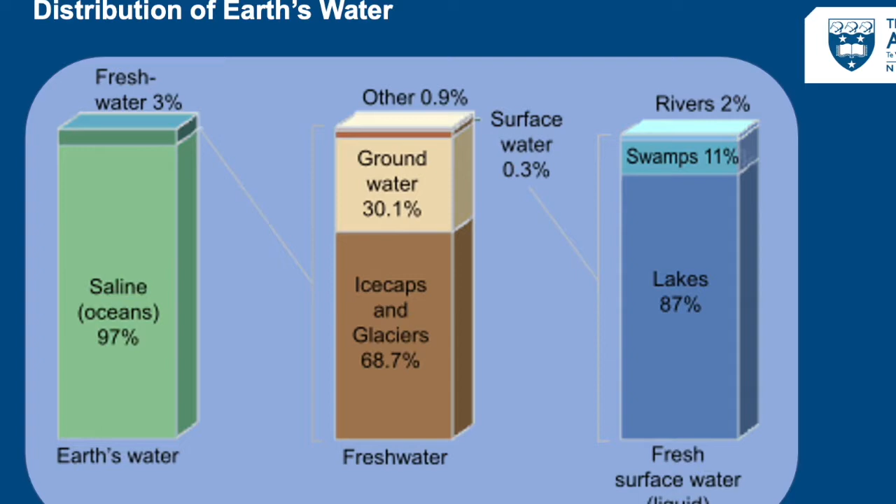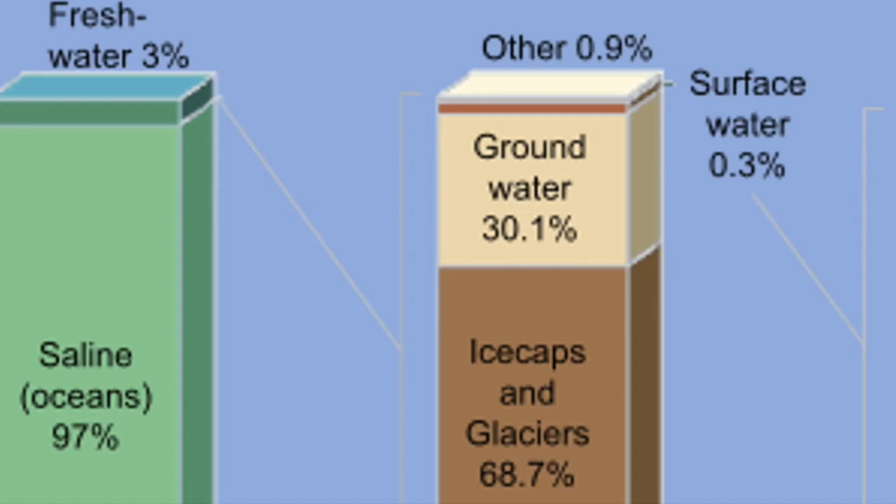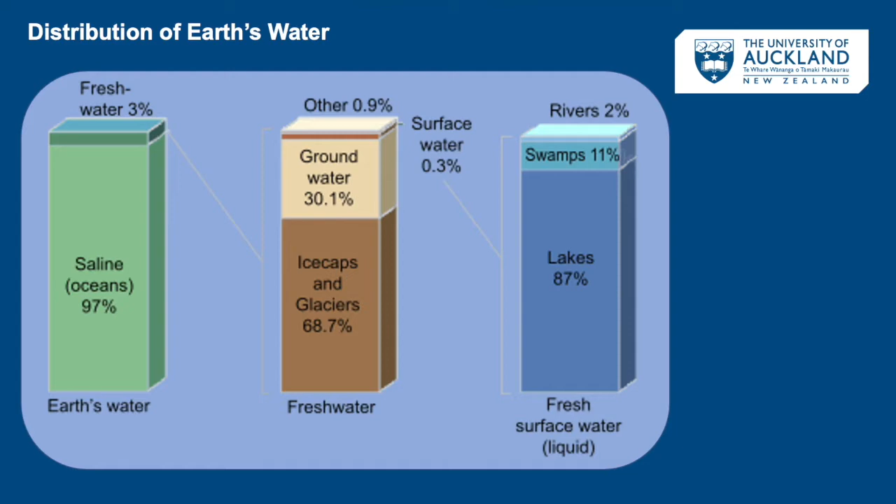The distribution of water on the Earth's surface is extremely uneven. Only 3% of the water on the surface is fresh. The remaining 97% is in the ocean. Of the fresh water, 69% resides in glaciers, 30% underground, and less than 1% is located in lakes and rivers. Looked at another way, only 1% of the water on Earth's surface is usable by humans, and 99% of the usable water quantity is situated underground.

The water cycle consists of three major processes: evaporation, condensation, and precipitation. Evaporation is the process of a liquid's surface changing to a gas. In the water cycle, liquid water in the ocean, lakes, or rivers evaporates and becomes water vapor. Condensation is the process of a gas changing to a liquid. In the water cycle, water vapor in the atmosphere condenses and then becomes a liquid.

Unlike evaporation and condensation, precipitation is not a process. Precipitation describes any liquid or solid water that falls to Earth as a result of condensation in the atmosphere. Precipitation includes rain, snow, and hail.

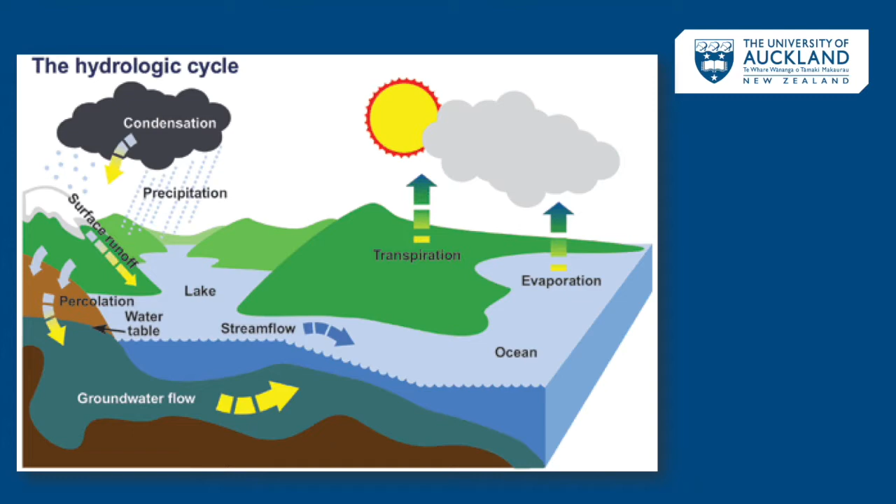The water cycle has a dramatic influence on the Earth's climate and ecosystems. Climate is all the weather conditions of an area evaluated over a period of time. Two weather conditions that contribute to climate include humidity and temperature. These weather conditions are influenced by the water cycle. The water cycle also has an influence on the physical geography of the Earth. Glacial melt and erosion caused by water are two of the ways the water cycle helps create Earth's physical features.

Water is managed at three levels of government: the national, regional, and local. The main plans we use to manage water are the Auckland Plan, the Unitary Plan, the Long-Term Plan, and our Asset Management Plans. Together, they provide direction, development rules, finances, and work program that determine the Council's activities. They also affect what everyone else can do across the region.

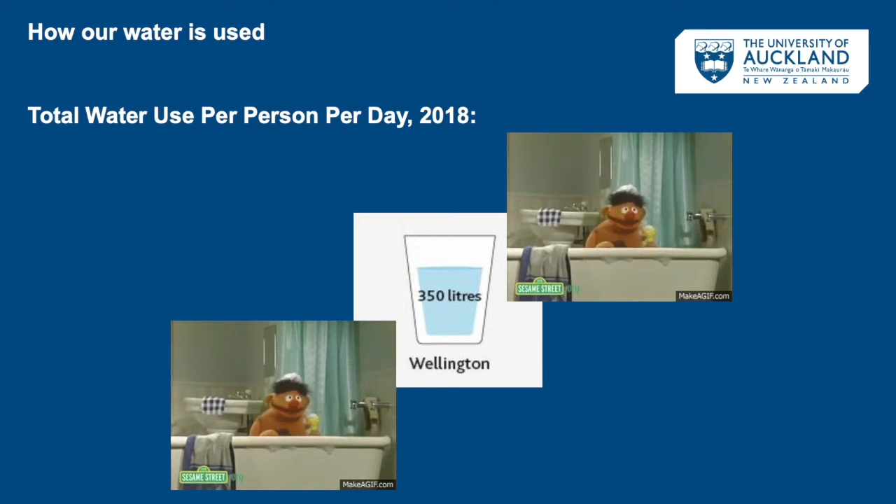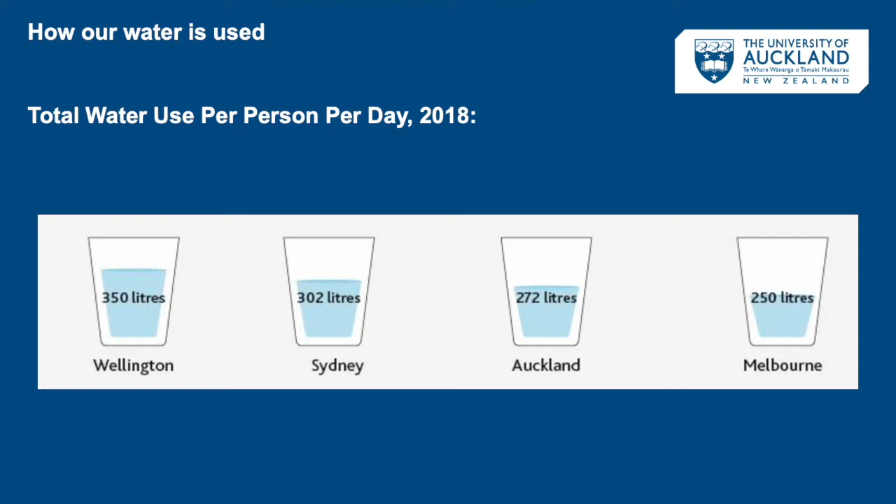Let's start with drinking water. How do we use drinking water? In this graphic, we use a comparison between the average water use per day per person in 4 different cities in New Zealand and in Australia. As we can see, in Wellington, on average, each person uses 350 liters per day. That's an average of about 2 bathtubs full of water per person per day. Residents of Sydney are a bit more conservative with their water usage at 302 liters. In Auckland, we do a better job reducing consumption at about 272 liters. And in Melbourne, residents sip a mere 250 liters per day.

The majority of this water is used for residential purposes. For example, we use 27% just for showering, another 23% goes to washing clothes, 18% gets flushed down the toilet, and 14% goes through the water taps.

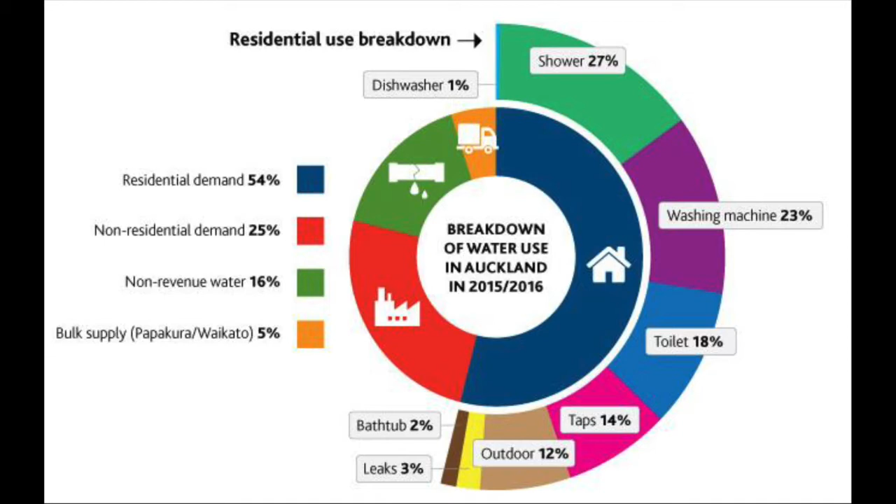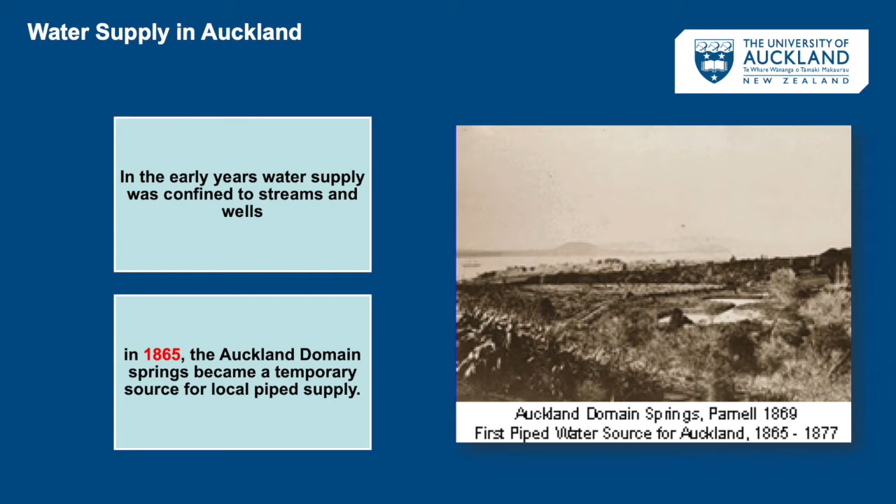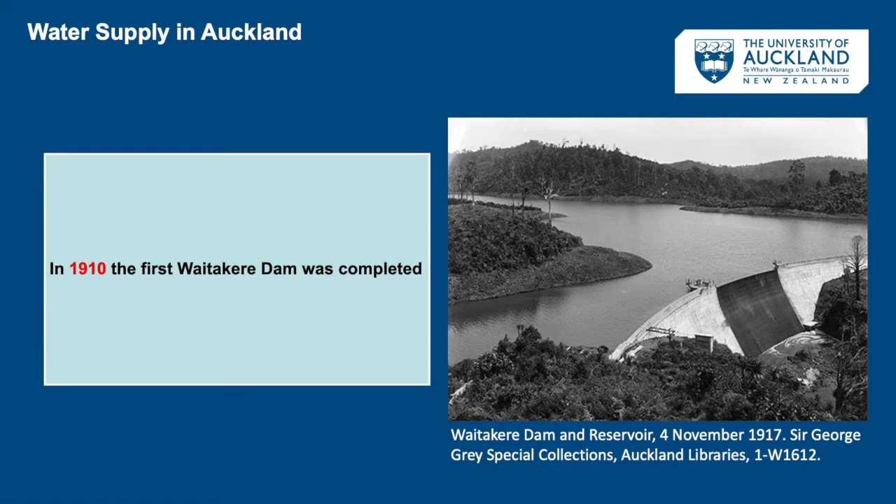Aucklanders haven't always consumed so many liters of water per day. Consumption was a lot different 100 years ago, and also the source of water was quite different. 100 years ago, the sources of water were mainly from streams and wells. In 1865, the Auckland Domain became a temporary source of water for Aucklanders. Then, Western Springs became the primary source of Auckland's water supply. In 1910, the first Waitakere Dam was completed. From 1950 to 1977, the Hunua Ranges dams were constructed, which became the main source of Auckland's water supply and continue to be to this day.

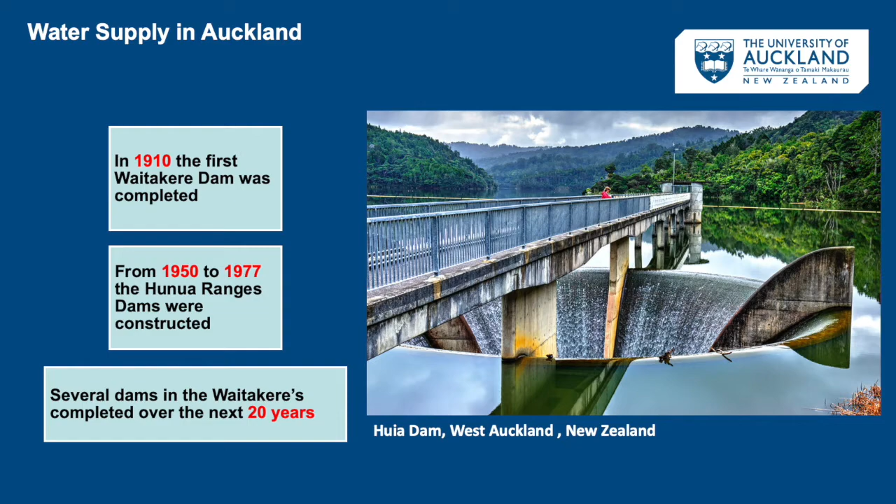Watercare is New Zealand's largest water and wastewater company. It supplies around 400 million liters of drinking water daily to Auckland. These waters are from 10 dams, 1 river, and 1 underground source. 60% of the water is produced from 5 Hunua dams, 25% from Waitakere dams, and 10% from the Waikato River. The remaining 5% from Onehunga wells.

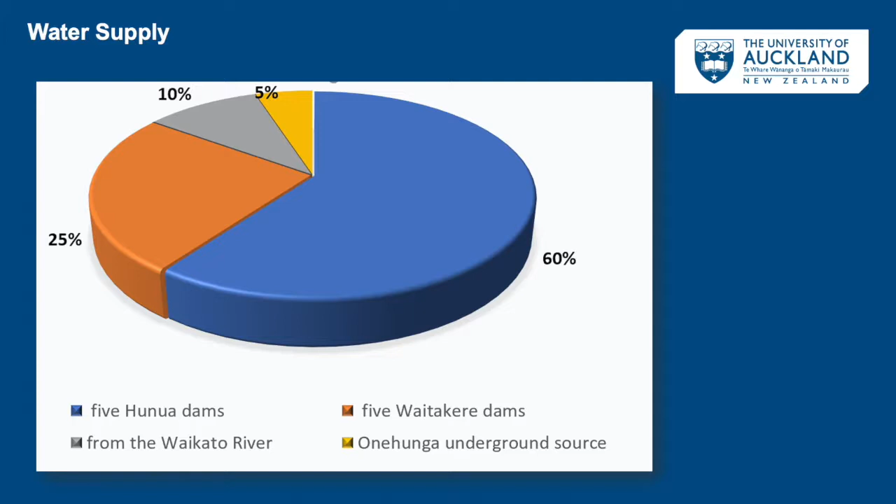Other cities around the world are developing long-term sustainability plans for their water supplies. For example, by 2040, London will manage its rainwater sustainably to reduce flood risk and improve water security, maximizing the benefits for people, the environment, and the economy. This is from the London Sustainable Drainage Action Plan. In the US, in San Francisco, they want to optimize the use of their finite water and energy resources to balance community and ecosystem needs, creating a more resilient, reliable future.

In Australia, the Cooperative Research Centre for Water-Sensitive Cities has supported stakeholders to develop transition strategies for different cities. Each city has defined its own vision with some shared aims. Currently, the vast majority of our water comes from dams.

But by 2050, we will need to diversify the sources of our water to continue to meet demand. Fresh water is a scarce resource. Even though it rains frequently, we have limited large rivers, lakes, and underground resources in the region to draw water from, and we are becoming increasingly reliant on the Waikato region to meet those needs.

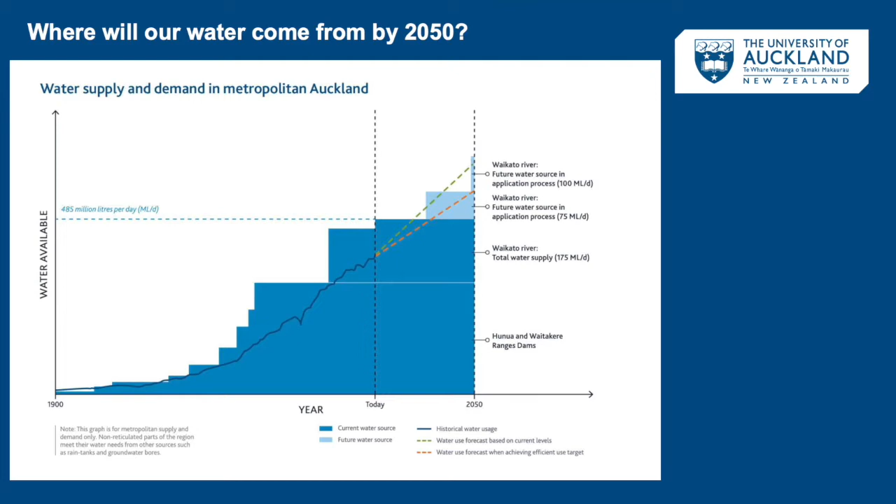We need to evaluate a range of options for meeting our future water needs. This includes making the most of what we already have and potentially developing other new sources of water supply. Because our supply options within the region are very limited, the solution is likely to be a mixture of some or all of the following. More efficient water use, that is, reducing our own demand for water. Maybe watering our lawns less or washing our car a few less times.

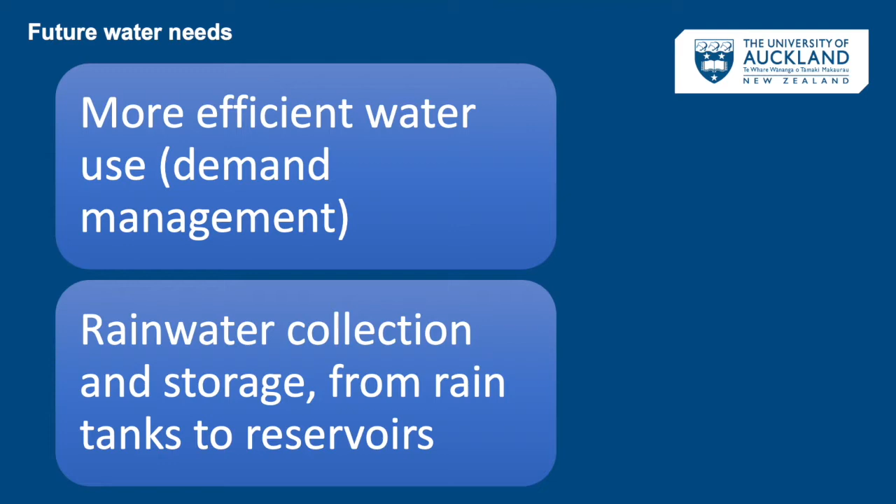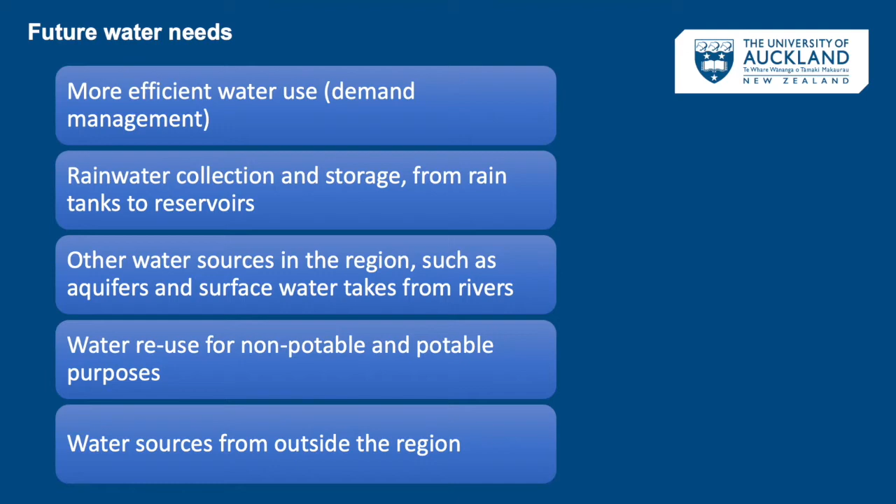Rainwater collection and storage from rain tanks to reservoirs, and this can be done at the individual level with rain barrels at the end of water spouts. Other water sources in the region, such as aquifers and surface water takes from rivers. Water reuse for non-potable and potable purposes, so we may use some gray water, water that's gone down the sink, to water the lawn or the grass or gardens, rather than fresh water. Water sources from outside the region may be imported to help supplement that supply over time.

Drought-stricken Auckland is staring down the barrel of a hot summer after a lengthy and punishing dry spell this year. The super city will be released from the shackles of household water restrictions later this month, but authorities say it hasn't escaped its water woes just yet. The region's dams are just 72% full, when they're usually 90% full at this time of the year. Our reporter Jean Bell and camera operator Dan Cook went to check out whether the city's water supply will last the summer.

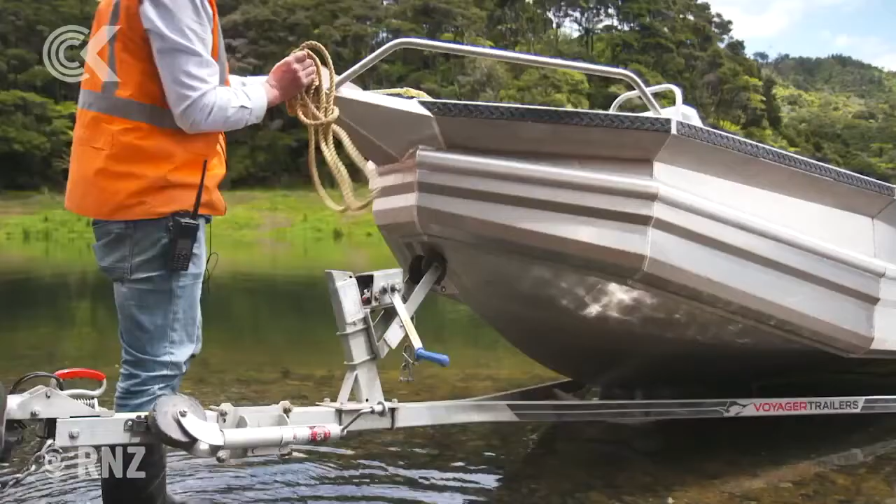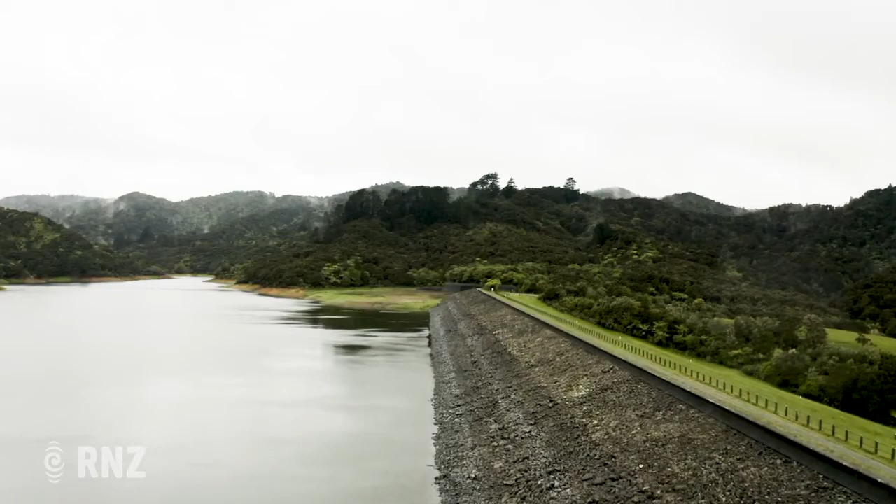The council has splashed out $224 million on infrastructure to increase take from the Waikato River and other sources, including the Hayes Creek Dam and a new treatment plant in Pukekohe. Mr Talbot says full-up dams would be ideal, but this increased supply and decreased demand has helped keep things afloat. The draw off the lakes has been significantly reduced, and that's largely down to the great job Aucklanders have been doing. But Mr Talbot says Aucklanders can't afford to take their eye off their water usage.

For me personally, the lakes are still lower than what they would have been prior, so it's still going to be really important for people to maintain those good habits that have been instilled over the last few months. And he's got some water saving tips for Aucklanders. I'm a big fan of the additional buckets in the shower, that's for sure, for use elsewhere around the home or house. In addition to that, particularly for people that have high pressure coming out their taps, just being really vigilant about how long those taps are open for and keeping them closed when they're not in use.

Watercare Acting Chief Executive Marlon Bridge says while things have improved, Auckland's not off the hook yet. Well, right now we're at a comfortable level in terms of where the lakes are at, and demand's been exceptionally good, with Aucklanders saving over 7 billion litres to date.

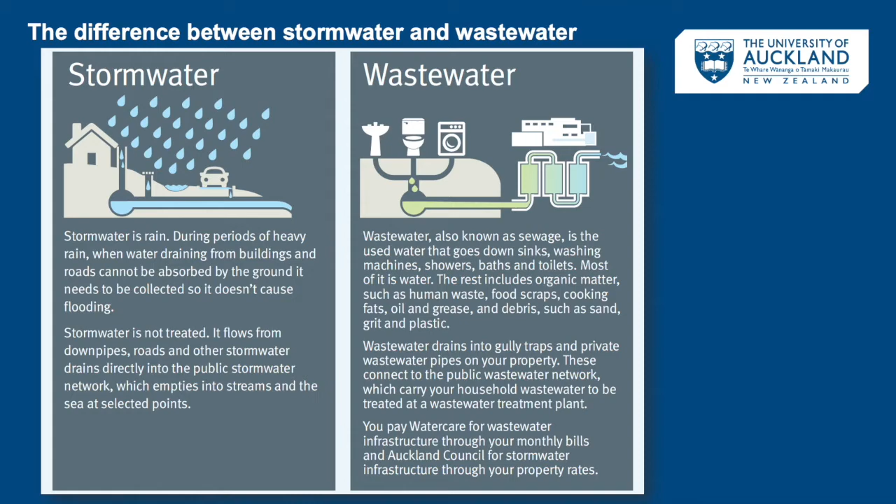Stormwater is rainwater that flows across roofs, roads, and driveways into the stormwater system. It is important to note that stormwater is not treated to remove any pollutants. Wastewater is the dirty water from houses and businesses that is flushed or sent into the wastewater system. Wastewater ends up at the wastewater treatment plant, where the wastewater is treated, solids removed, and the liquid is discharged into the sea. It is very important to manage stormwater and wastewater because healthy water systems nourish the natural environment.

The health of our waterways is very closely connected to the activities that are happening on the surrounding land. Some streams are surrounded by native bush and have clean water and thriving animal and plant populations. By contrast, most of our urban streams are in poor health. The health of our rural waterways is mixed, depending on how the surrounding farming, forestry, and agricultural practices are managed. Our harbours and marine waters hold an incredible array of biodiversity, but sediment from land-based activities is muddying the waters and endangering sea life. So what's causing the degradation?

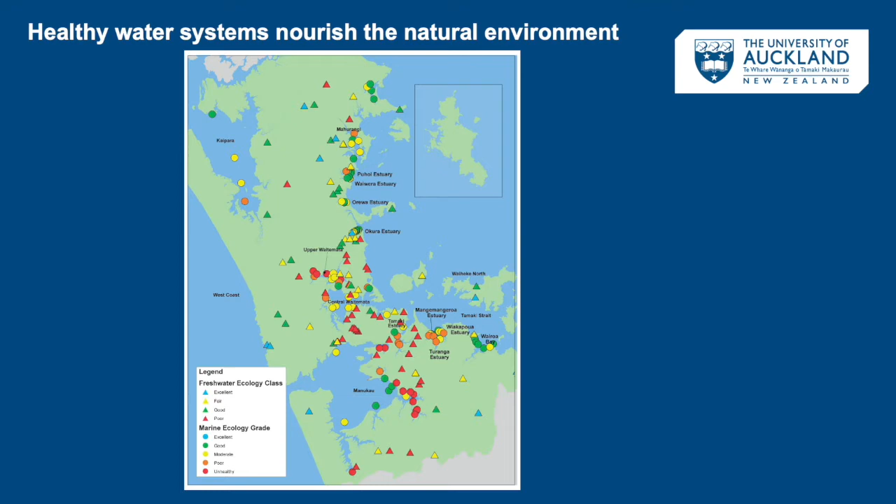It's not a straightforward answer. Sediment comes from land disturbance like earthworks, forest harvesting, and stream erosion and slips. Many other contaminants accumulate from diffuse sources that are difficult to manage, like the heavy metals that come from the pads on your car brakes, and roads act like a pipe for rain to wash these materials into the environment. If you look at the map, you can see water quality is generally better in remote parts of the region and worse in populated areas. There's a direct correlation between population and development and water quality.

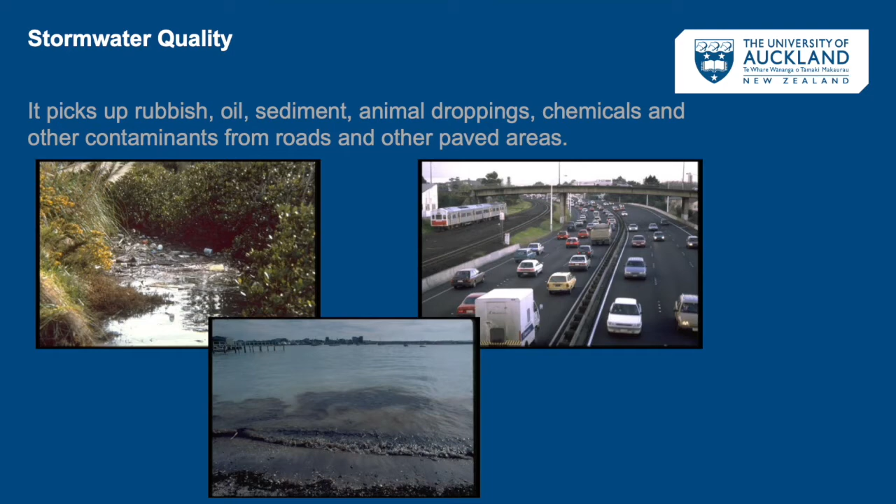Stormwater affects the quality of our environment as it picks up rubbish, sediment, animal droppings, chemicals and other contaminants from roads and other paved areas. And finally, it can be transferred to our seas, which pollutes our water bodies. It is very important for us to manage stormwater because we understand that stormwater is making our environment polluted.

There are 3 objectives to stormwater management: minimize flooding, maintain the environmental value of our aquatic habitats, and prevent the pollution of our seas. There are a variety of methods used to manage stormwater.

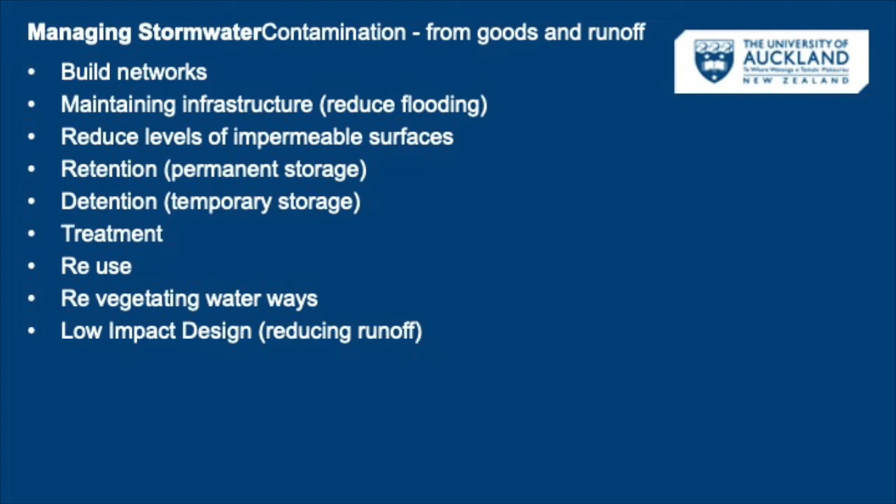They include building networks, maintaining infrastructure, that is to reduce flooding, reducing levels of impermeable surfaces, retention, that's permanent storage of stormwater, detention, the temporary storage of stormwater, treatment, reuse, revegetating waterways, and low impact design, that's reducing the amount of runoff after a storm. We will talk about each of these as we move forward.

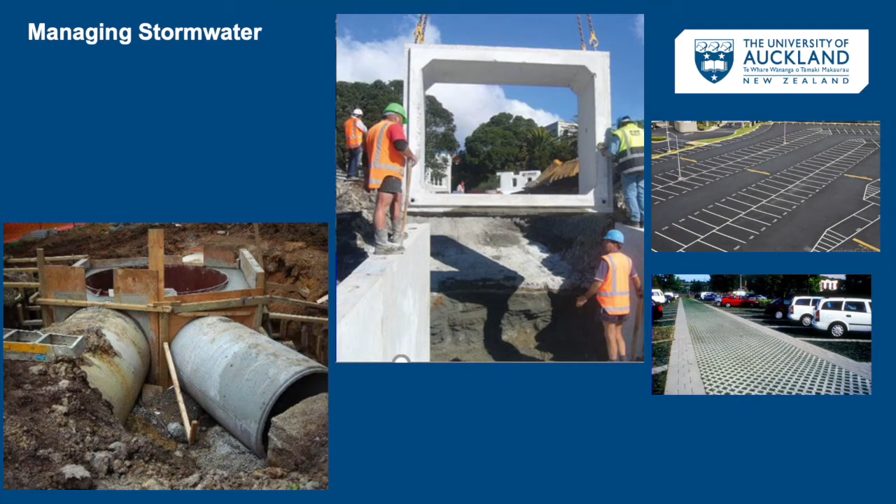There are a variety of infrastructure-based techniques used to manage stormwater. Stormwater network reticulation is a piped network which carries stormwater. Sometimes the network drains directly to a water body, but other times it can be filtered first.

Traditional development approaches rely on vast amounts of impermeable or impervious surfaces. These are hard surfaces which prevent or slow down the entry of water into the soil. Examples include roofs, car parks, and concreted areas.

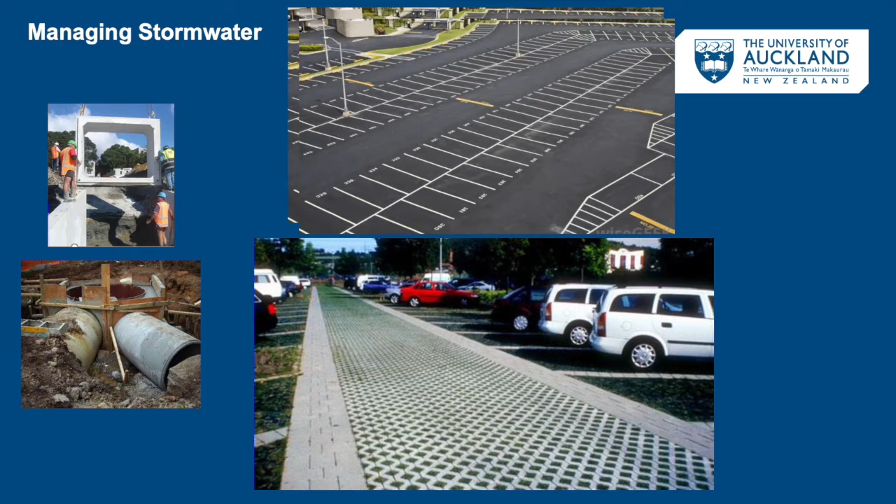More modern approaches that include better stormwater management incorporate natural ground surfaces, including trees, grass, and soil, which allow water to pass through and soak into the ground, which results in reducing the volume of runoff flowing over the ground.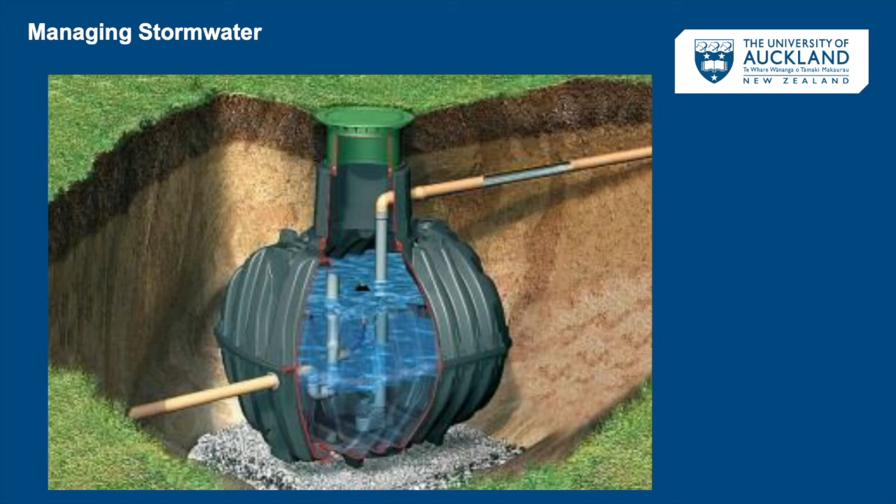Another example of stormwater management in the built environment is a rainwater retention tank. This is a rain tank which is used to temporarily store rainwater and release it at a slower rate through a specially designed hole. In some cases, the water may be stored and used for non-potable water demands, such as watering a garden. An additional example of urban stormwater management includes biofiltration practices and water reuse.

For example, curb cuts or openings can be placed in the curb to allow water to pass off the paved surfaces into a biofiltration practice. This practice allows both objectives, traffic control and stormwater management, to be attained.

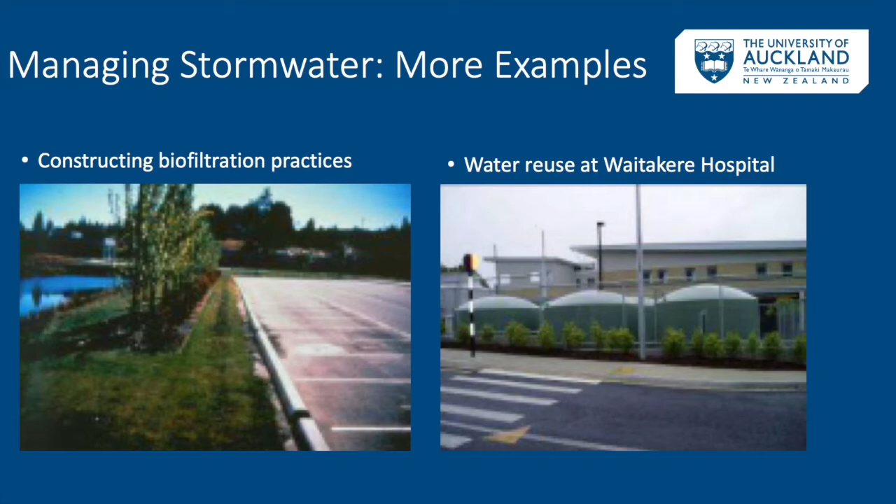Using stormwater generated from roof areas or even from impermeable surfaces for domestic or industrial purposes can reduce the total volume of stormwater discharged, as urban reuse is separated from catchment stormwater delivery. Water reuse is potentially a valuable tool in reducing stormwater runoff volumes and has other benefits, which include reduced use of potable water for non-potable needs.

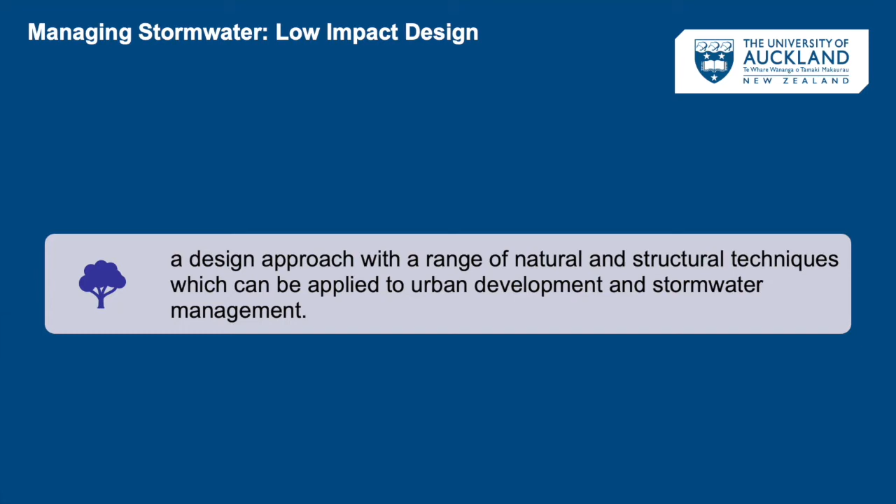Design-based stormwater management is called low-impact design. This is a design approach for site development that protects and incorporates natural site features into erosion and sediment control and stormwater management plans. A few locations in Auckland have incorporated stormwater management design into their overall site plan.

For example, the Stonefields stormwater treatment contributes to flood protection from any likely storm for all dwellings within the Stonefields development, a cost-effective stormwater management area which has been provided that maximizes the land available for development, and it also provides a significant community amenity. It also provides an opportunity to educate the community about stormwater within natural and urban environments via signboards.

Wastewater, also known as sewage, is used water that goes down sinks, washing machines, showers, baths, and toilets. Most of it is water. The rest includes organic matter such as human waste, food scraps, cooking fats, oil, and grease, and debris such as sand, grit, and plastic. Wastewater may also include household and business chemicals, paint, and medicines. These can be harmful to our health, our harbors, and our waterways, so effective treatment is quite important.

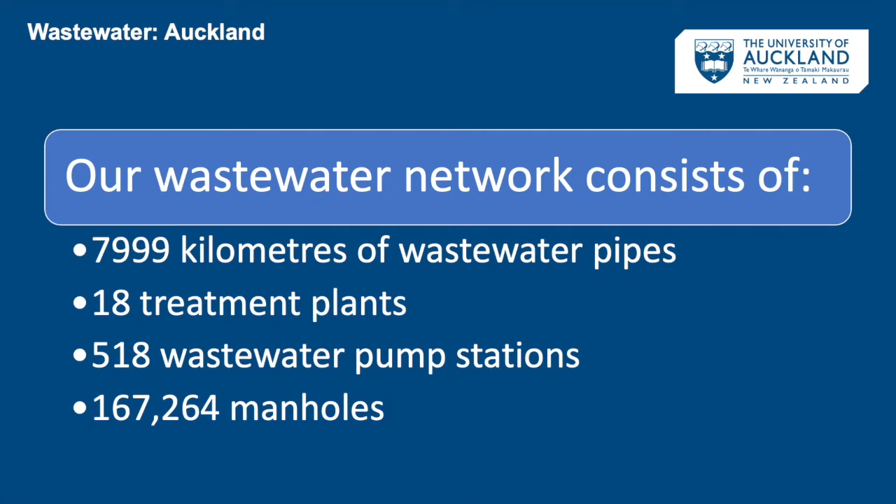There are 3 steps to treating wastewater: primary treatment, secondary treatment, and tertiary treatment. Primary treatment is mechanical and essentially involves separating solids from the liquid waste stream, which has additional stages by itself. First, screening. Screening is the first line of treatment at the entrance of the treatment plant. Here, the solids are removed by filter from the liquids. Second, debris such as plastic, leaves, etc. is separated from the waste stream.

Third, pre-treatment occurs when wastewater from Auckland's main sewers enters a mixing chamber at the start of the processing. Air is blown into the wastewater to prevent solids from settling out. Gases are extracted at this point and at numerous stages throughout the treatment process and pass through odor control filters.

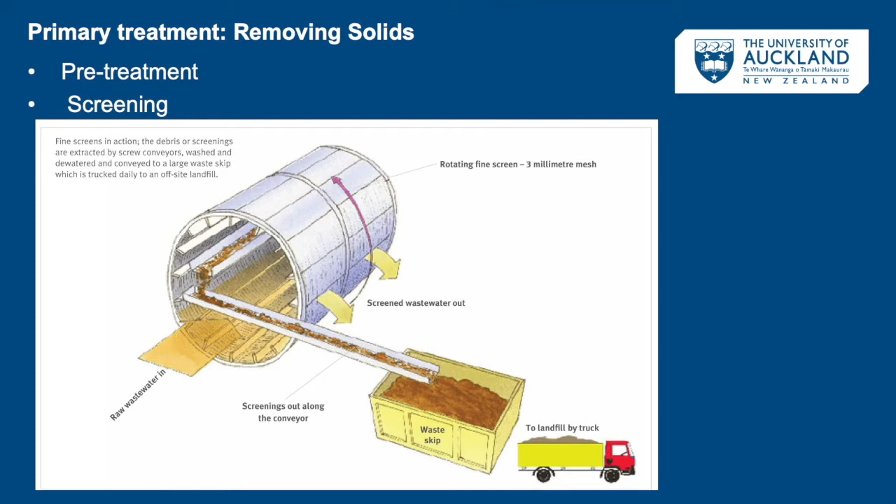Secondary treatment is carried out in 9 large circular reactor clarifiers. Each reactor clarifier has the capacity to hold 31.3 million liters, equivalent to the wastewater treatment requirements of 200,000 people.

The secondary treatment system is known as biological nutrient removal and uses a process known as activated sludge with high levels of bacteria. The system relies on controlled growth of populations of bacteria to biologically strip out organic pollutants, in this case nitrogen and ammonia, and reduce the biochemical oxygen demand of the wastewater.

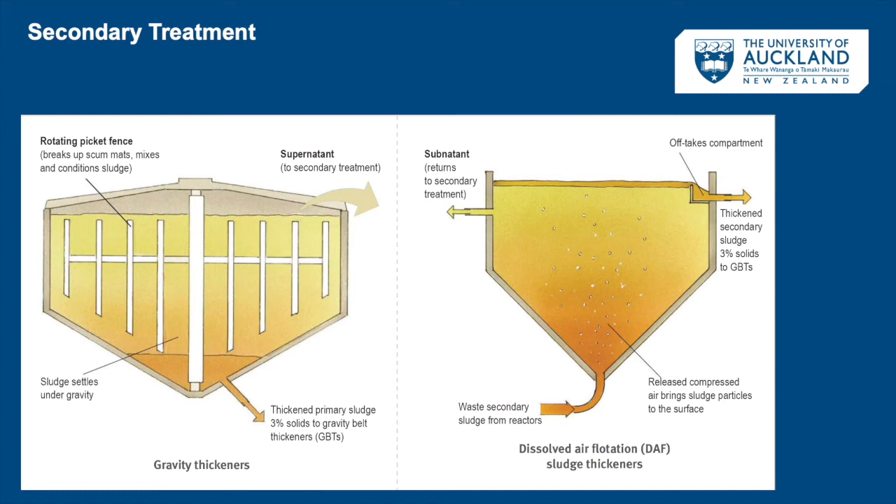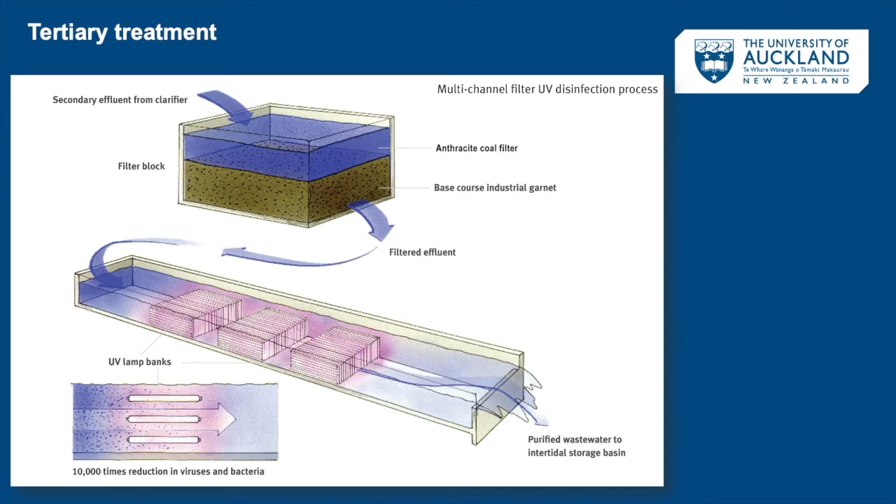The final or tertiary stage of the land-based wastewater treatment system is disinfection, using ultraviolet light. In this process, clarified sewage from the reactor passes through the disinfection plant.

Back in early 20th century Auckland, people used to leave a bucket of their human waste out in the street each night, ready for collection by a horse-drawn night cart. Luckily for us, we've come a long way since then.

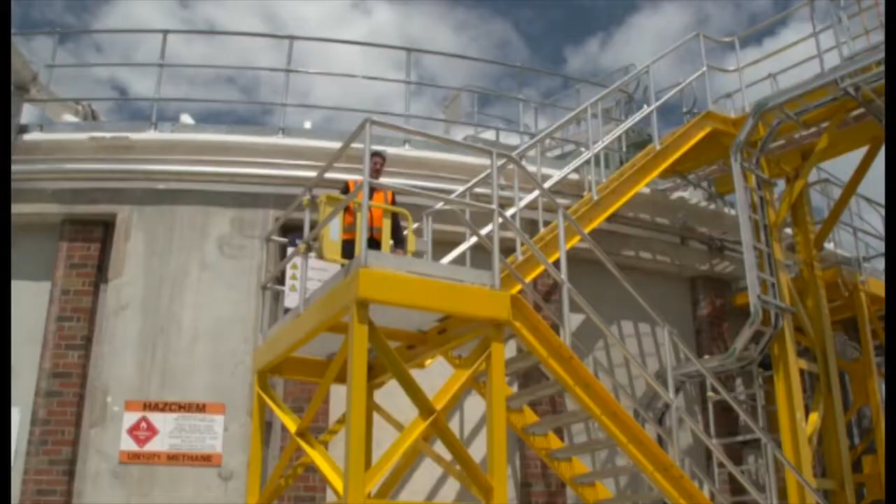These days, our team at Watercare have the responsibility to collect and treat the wastewater produced across the entire Auckland region. Most wastewater comes from toilets, showers and washing machines. The remainder includes organic matter like human waste and food scraps, and things that shouldn't enter our pipes, like cooking fats, wet wipes and stormwater.

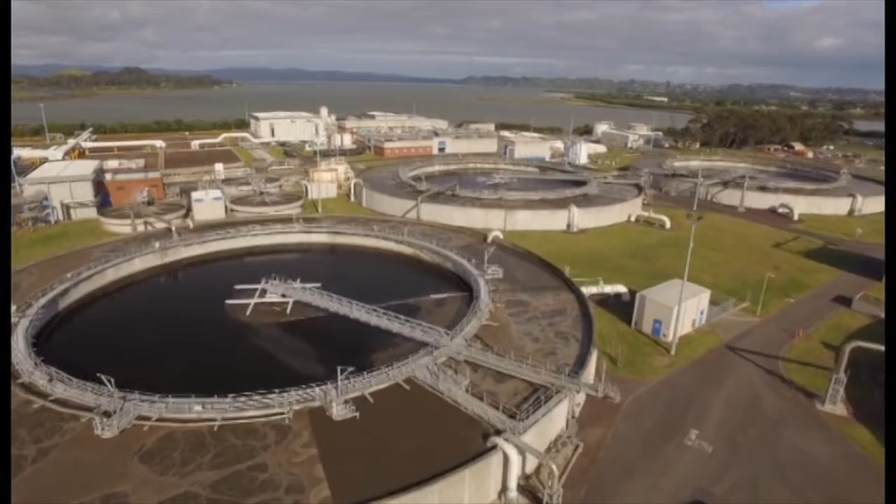Wastewater can also include things like household chemicals, paint and pharmaceuticals that can be harmful to our health and to our harbours and waterways. So effective treatment is very important.

24/7, nearly 8,000 kilometres of pipes carry Auckland's wastewater to one of 18 treatment plants throughout the region. Here the wastewater is treated to standards that protect public health, the local environment and our coasts and harbours. It's a responsibility we take extremely seriously.

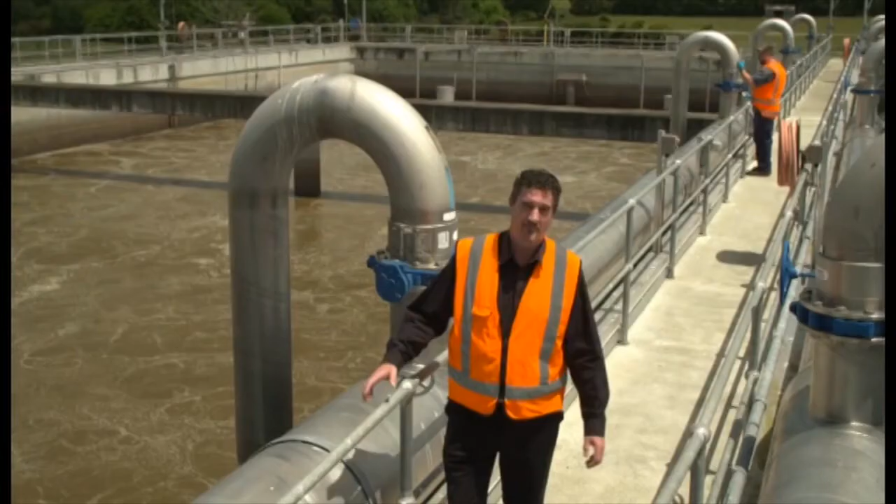Our smaller wastewater treatment plants serve our rural communities, but most of the wastewater is treated at the Māngere or Rosedale plants. The Māngere wastewater treatment plant is Auckland's largest, and it's one of the most advanced plants in the world. It handles about 3/4 of the region's wastewater and liquid trade waste. Here, wastewater is treated in 3 key steps.

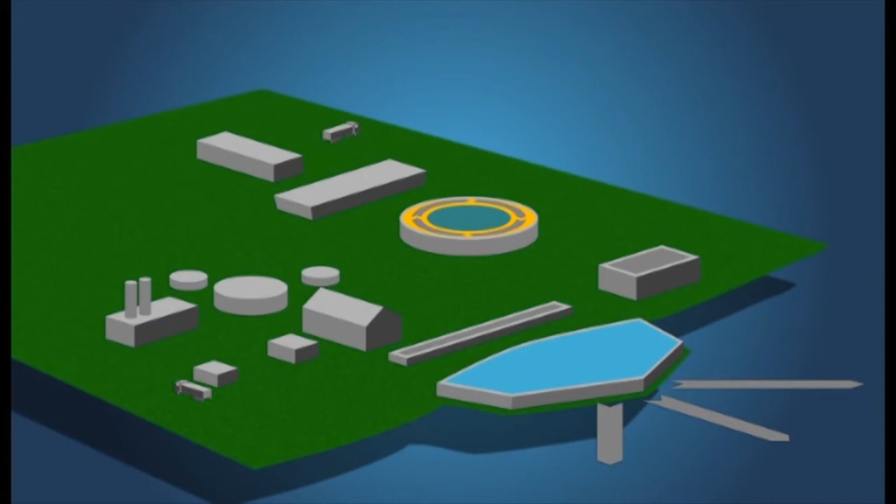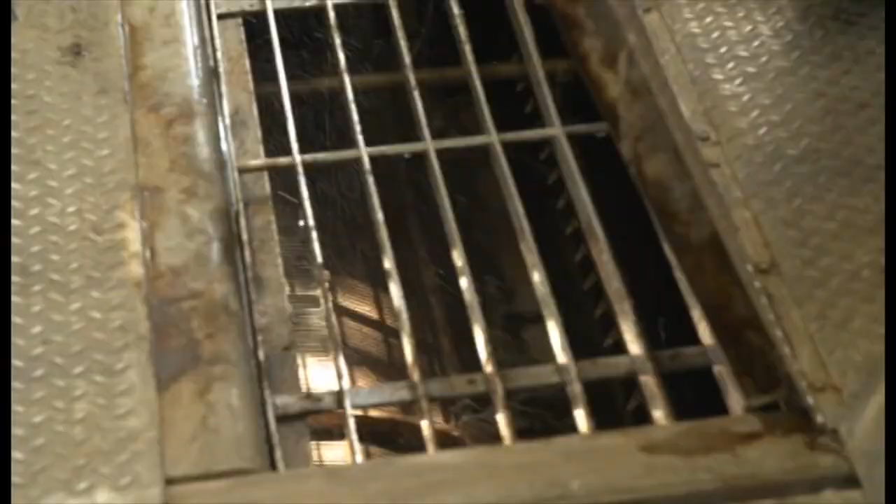First, raw wastewater goes through screens, which removes any solids greater than 3 millimetres. Large stainless steel rotating drum screens collect the material, feed it up a conveyor, and deposit it in a large bin, ready to be trucked to landfill.

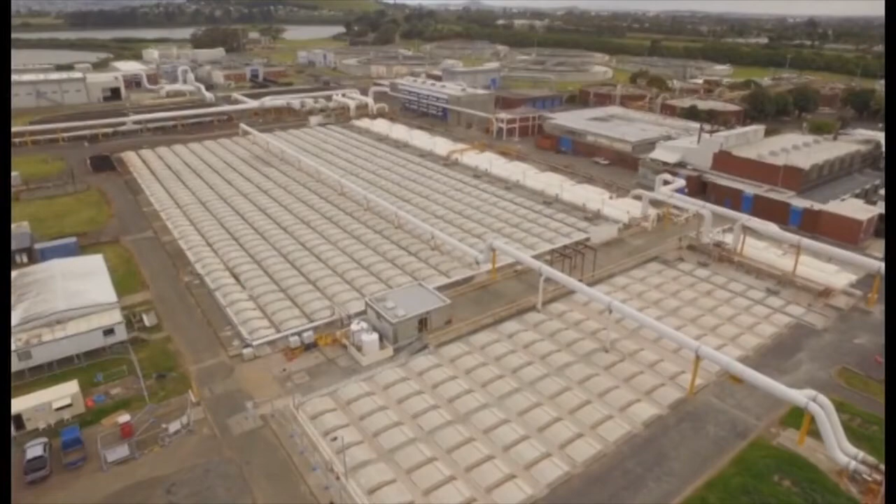We find all sorts of things in the screenings process: rags, food scraps, wet wipes, toys, jewellery, false teeth, passports, even cash. The liquid then goes through large sedimentation tanks where sand and grit is removed and sludge sinks to the bottom and is separated from the liquid.

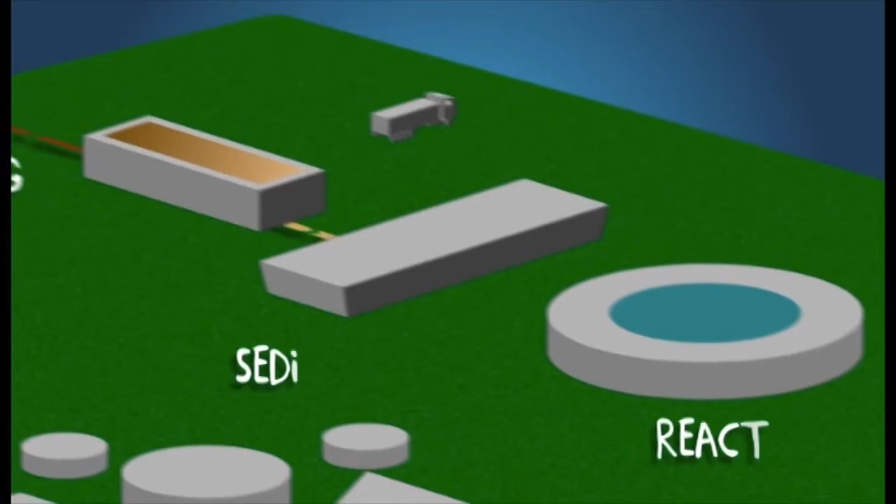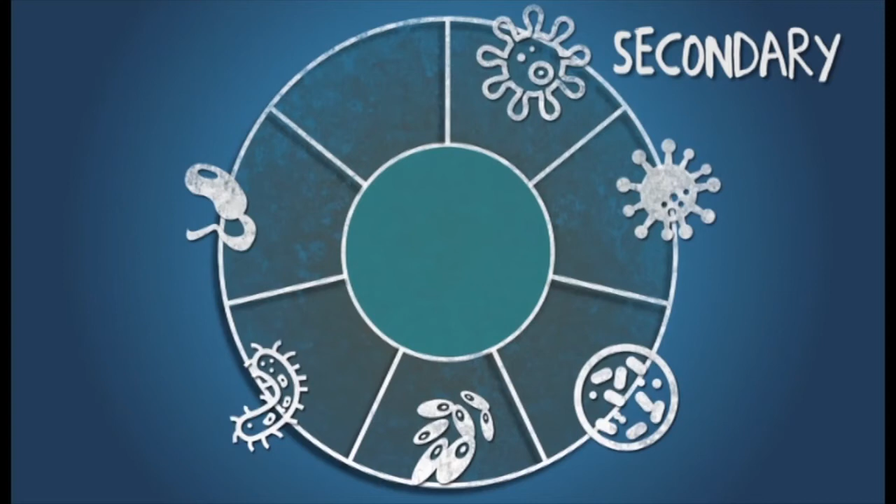In the secondary stage of treatment, we use aeration and pumps to create an environment to grow special bacteria which convert and remove contaminants that can be harmful to the environment. An army of different microorganisms live in these giant reactor clarifiers, eat the carbon and reduce the amount of phosphorus and nitrogen in the wastewater.

In the aerobic zones, ammonia and organic nitrogen is converted to nitrates. In the anoxic zones, these nitrates are converted to harmless nitrogen gas. This entire process is biological, which means no chemicals are needed.

It's also one of the most dangerous parts of the treatment plant. If you fell into the reactor zone, you'd sink to the bottom, even if you're wearing a life jacket. That's because there's so much air in the wastewater, there's no buoyancy.

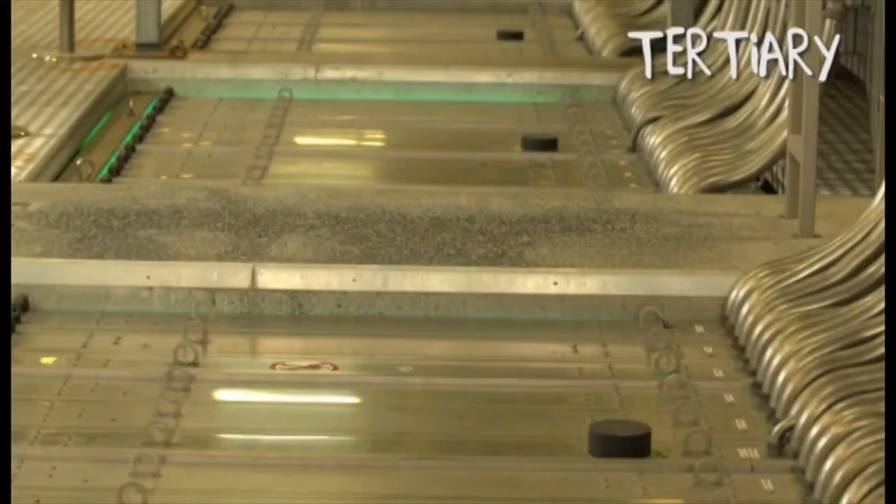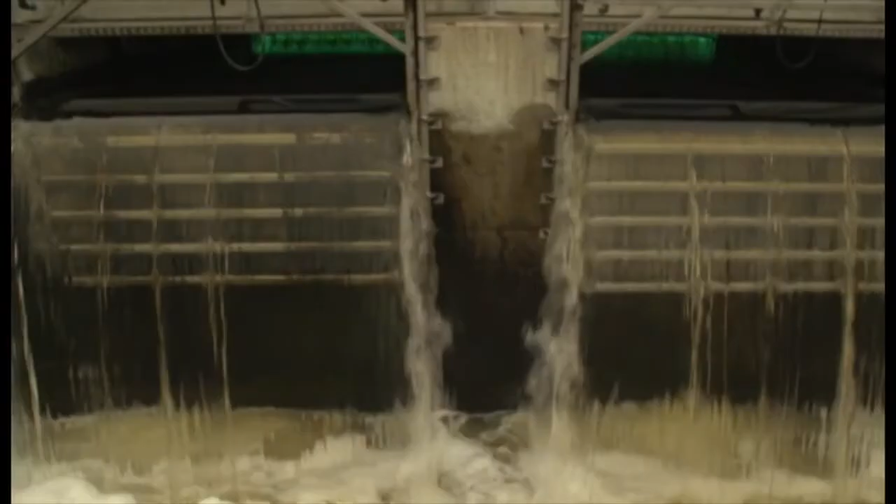By now, the liquid wastewater is looking really good, but to make sure it's ultra clean, we filter it and disinfect it with ultraviolet light. It travels through channels where it's exposed to powerful UV light, which delivers a 10,000-fold reduction in the number of harmful pathogens and bacteria. This is an extremely effective method of disinfection, which produces no chemical byproducts and is safe for the environment.

After filtration and UV disinfection, about 12 hours after the wastewater entered the treatment plant, and after many stringent quality tests every step of the way, the treated wastewater is safely discharged into the Manukau Harbour on the outgoing high tide. But that's not where the story ends.

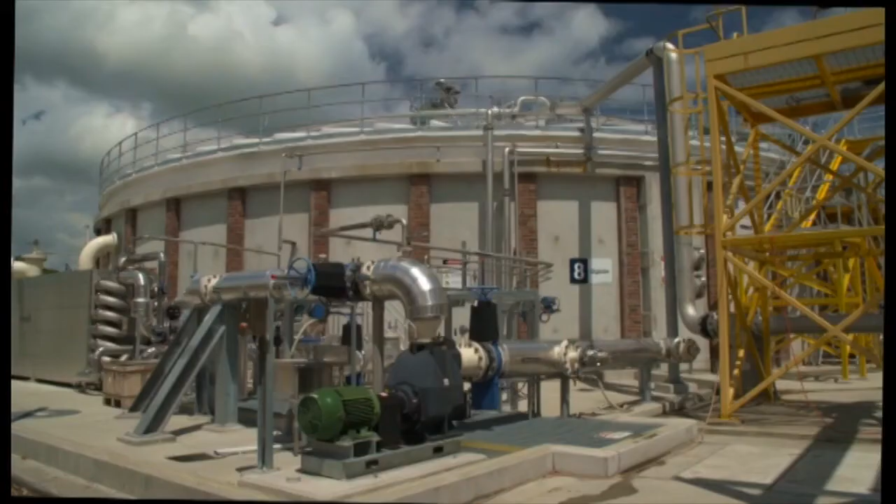Solids from the treatment process are thickened and digested to make it safe for disposal. During this process, methane biogas is created, which is then fed into engines to generate electricity for the plant. This produces about 2/3 of our plant's energy consumption, significantly reducing our operating costs.

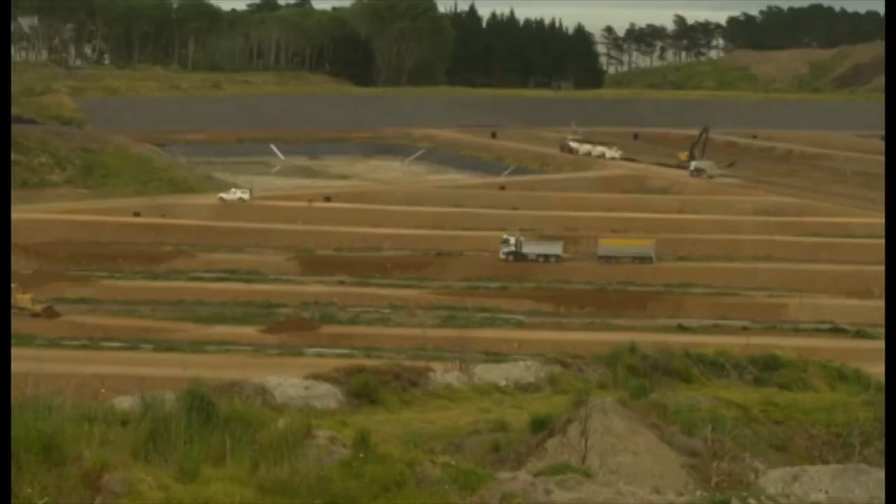Treated biosolids at our Mangere plant are put to further good use. They're transported to nearby Puketutu Island, where they're being used to restore a former quarry. Ultimately, it'll be transformed into a regional park for Aucklanders to enjoy into the future.

Auckland is a water city. Our beaches and waterways are our jewels. You can feel confident that we are working to protect and enhance our natural environment by treating wastewater to the highest standard. And in doing so, we're meeting all of our consent obligations, but more importantly, we're protecting the health and well-being of our communities.